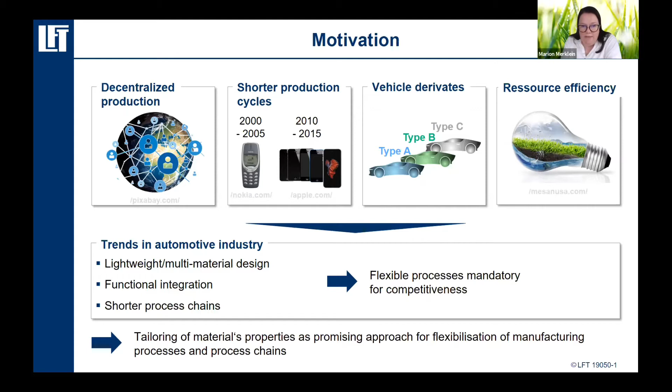Our idea is to tailor the material properties in order to fulfill all these demands. If you look at the definition of tailoring in the Cambridge Dictionary, it's called 'specially made for a particular purpose'. What does this mean for forming processes? In this context, it means we have to adapt the properties of materials to enable a specific forming operation, and to get a good, robust process chain with a successful product at the end.

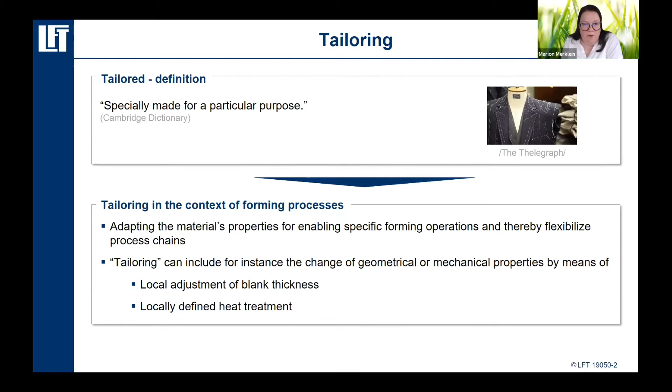This means that for tailoring, we need possibilities to adjust not only the geometrical aspects, but also the mechanical properties. This can be done either by a locally defined heat treatment of the material, to locally and temporarily adjust the mechanical properties, or we can also have a local adjustment of the blank thickness.

If we look at tailored blanks, the first ones we ever saw in the world were tailor welded blanks, for which different or dissimilar materials—dissimilar either in sheet thickness or in mechanical properties—were joined by welding.

A few years later, the first patchwork blanks arrived, where a second blank is used for local reinforcement, joined by either welding or gluing. Of course, all the designers told the engineers: wonderful ideas, but gluing, welding, the weld line—that's a defect within the material, so not so good. Could you please deliver some other ideas?

At nearly the same time, a group of researchers from Stuttgart and Erlangen developed the so-called tailor heat-treated blank—blanks for which a local heat treatment was used for a local, temporary adjustment of the mechanical properties.

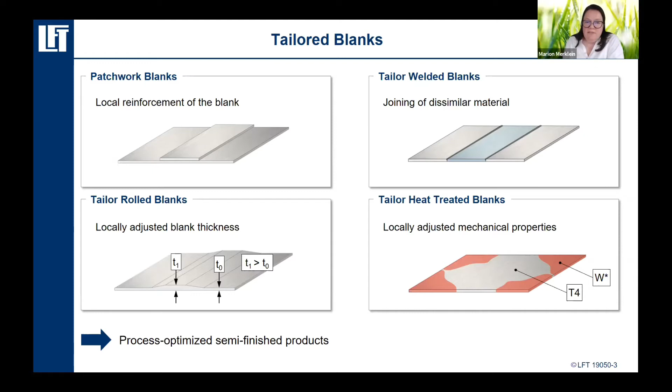In all cases, if you look at the literature, you can see that all these tailored blanks can be used as process-optimized semi-finished products for the improvement of forming processes.

So I want to talk about the tailored rolled blanks and the tailored heat-treated blanks. Why? The tailored rolled blank idea, as I told you, goes back to Rainer Kopp, and nowadays there is a company called Mubea.

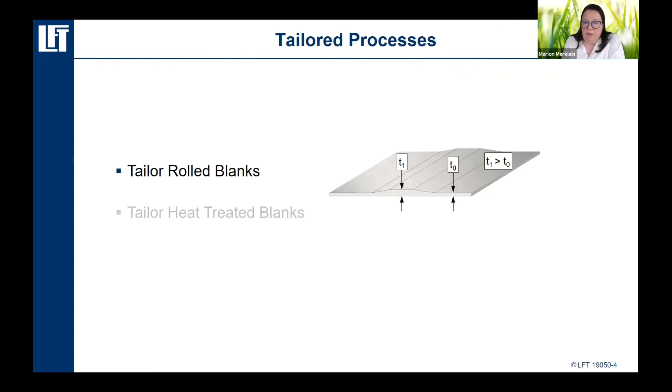They use such blanks also for the production, for example, of B-pillars or so in the automobile industry.

It was our idea about 12 years ago that we saw there was a huge number of components, not only in cars, but also in trucks, lorries, and machines - all such so-called functional components. Nobody is having a real closer look on them, but they are produced millions by millions, and so they are very important to take into account if we really want to improve material efficiency in the world.

So we took two typical examples. On one side, a synchronizer ring, you can see on the left, and a seat slide adjuster, that's the second component. One example is given by a company Diehl, another by a company Feintool, a company from Switzerland.

In all these components, you can see that over the last 30, 40 years, the demands on accuracy, functional integration, the aspect of weight of the components, and also the load-bearing capacity was increasing. And so the conventional production technologies came to a real limit. It was about 10 years ago that many companies said we reached an upper limit, we cannot enhance these limits. And so this was the time we started thinking there must be a new way.

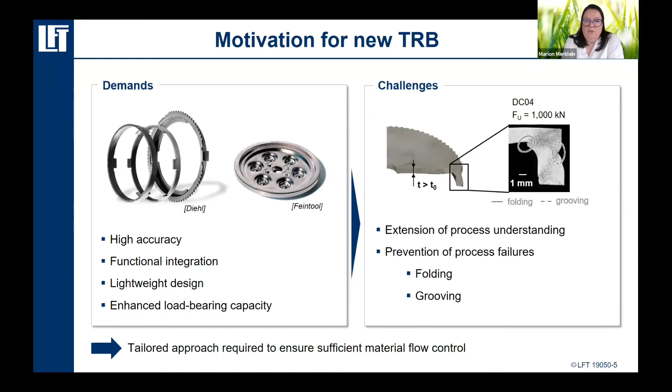Our idea was, why not use the idea Rainer Kopp had many years before, and enhance it to come to a tailored approach ensuring sufficient and improved material flow control in such forming processes. So what we did was, beside such tailored rolled blanks with a linear connection between two areas, we realized also circular tailored rolled blanks.

You can see here on the left the first example of such a tailored blank, where we increased the sheet thickness locally also in a rolling process. In this case, it's a mixture between a conventional rolling process and a ring rolling process. Doing so, we were able to increase the sheet thickness of the material where we need it.

And the comparison on the right, you can see if we use the conventional sheet, we have the problem of grooving and folding. If we use such a tailor rolled blank, we can see that the increase of sheet thickness will lead to an increase of stiffness, and so we are able to avoid the failures we saw before.

We can improve the quality, because in such a case, similar to a synchronizer ring, we need some geared teeth at the outside. So especially the geometry and accuracy of these gear teeth is very, very important in order to guarantee the function of the component afterwards.

What we saw is that we can improve the height of such gear elements by about 20 to 30%. That can be correlated directly with the increase of sheet thickness we can realize with a tailor rolled blank, and we can avoid the material backflow that is responsible for the folding of the material.

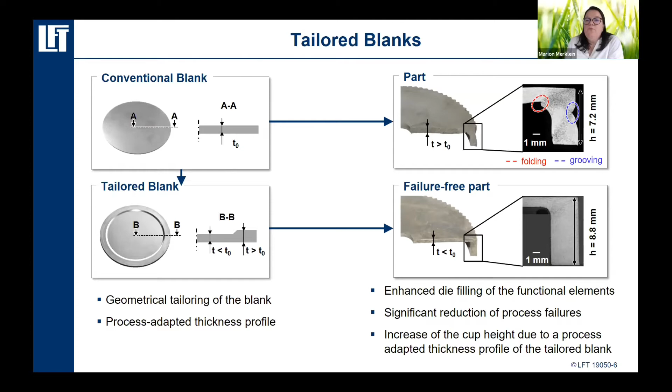But of course, doing so, we were at the beginning of the real fundamental research work. So what we did was investigate if we can apply such a technology on different materials, steels and aluminum alloys, to give a more general indication about the maximum thickening we can realize, and how we will influence the mechanical properties of such materials.

Here you see one example for two steels, a mild steel DC04 and a high-strength steel DP600. I can tell you that also for aluminum alloys we have similar results. So in general we can say in such a rolling operation we can have a local increase of the sheet thickness up to about 30%.

And 30% I think is a real good and interesting number, and according to the increase of the sheet thickness, of course, we have a strain hardening effect in the material, meaning that we change the mechanical properties, for example the yield strength and the tensile strength. These typical material values are increased by about 20 to 30%, depending on the work hardening exponent that is characteristic for the material.

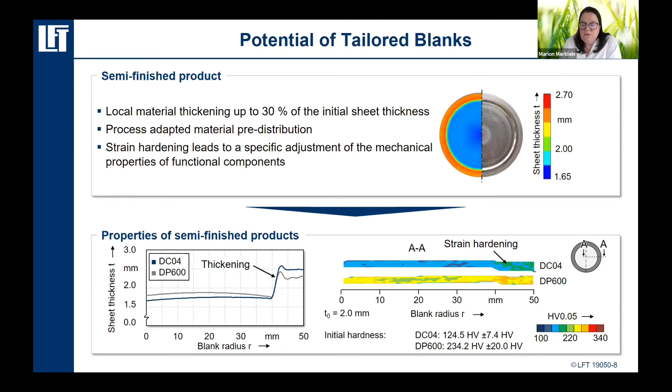As an indicator for this, you can see here some hardness measurements, because you can directly correlate the hardness and the yield strength of the material.

After our first success, we were interested in seeing which geometries we can realize. So we started, as you can see on the left, with a rotationally symmetric geometry - that was the real beginning. We had a thickening at the outside. Then we said, okay, let's also have a rotationally symmetric geometry on the inside with a reduced diameter.

And of course, then we had the idea - there must also be the possibility to realize cyclic symmetric and asymmetric geometry. As you can see, this is also possible, always in the same machine, using only different tools, which opens different possibilities to realize different geometries.

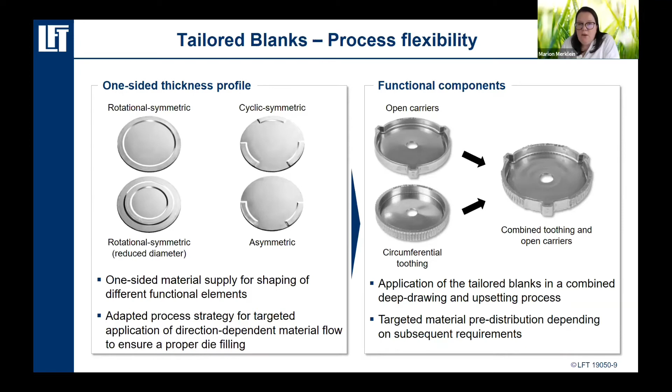For example, the geometries, as I mentioned before, such as what we call circumferential toothing - we can also produce open carriers and improve the formability. Or if we look at the next slide, we can see it's also possible to have such a thickening operation, a flexibilization of the material on both sides of the sheet metal.

And if we do so, we can also add, for example, such inner elements for carriers - internal carriers which are necessary for the load capacity of the component. So we can combine nearly any idea of thickening in order to improve the forming behavior and also the function of the component afterwards.

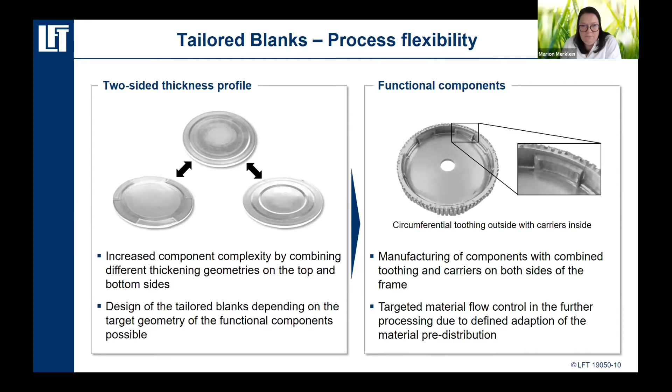And of course, that is one way that is especially important for steels. I can really say that's the most effective way to improve and flexibilize the formability of steels. In contrast, the second very important material for design in forming operations is aluminum. We need also a solution for that.

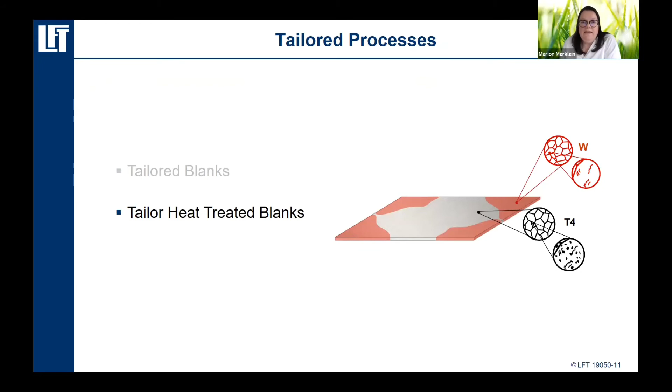The idea behind that is the so-called Tailor heat-treated blanks. What does this mean? The principal idea goes back to a publication from the 50s. They made such a local heat treatment and annealing for the first time with some copper. Afterwards, in the 90s, it was my colleague Frank Vollertsen with Kurt Lange - they investigated it on aluminum alloys.

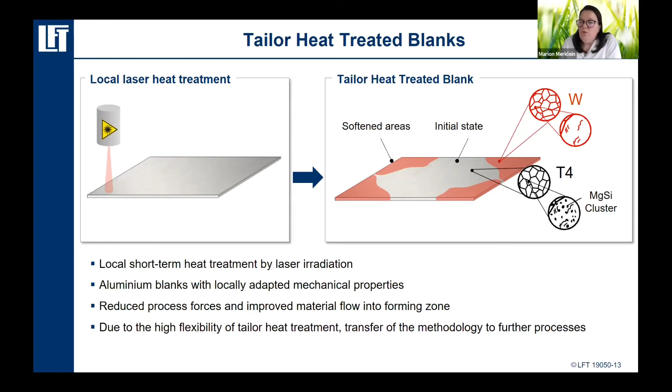The idea is to use a laser, for example, or any other heating device to have a very short local heat treatment, about 3-4 seconds, and to use the quenching effect and the solutioning effect of aluminum alloys so that we can soften the material locally. As a consequence, we can improve the material flow, lower the process forces, and flexibilize again the tools we use for different materials.

To show this to you, I can give you an example of a drawing tool that is used for drawing outer door panels. This is designed for the drawing of a steel forming operation. And if you use an aluminum alloy, in this case a precipitation hardenable aluminum alloy, you can see at once that fracture may occur.

As a consequence, we said, okay, we can do such a process analysis using finite element analysis, investigating where in reality the material flow has to come from, where the material flow stops first, and if we do so, we know which areas we have to locally heat treat in order to soften the material and improve the material flow.

On one hand, you can follow such a process route in the virtual world, doing all of that by FE analysis. On the other hand, you can also do it in reality, because you can transfer the results coming from the FE analysis. If you use, for example, optimization methods like simulated annealing, you can transfer the results regarding the mechanical properties of the material to a necessary temperature distribution.

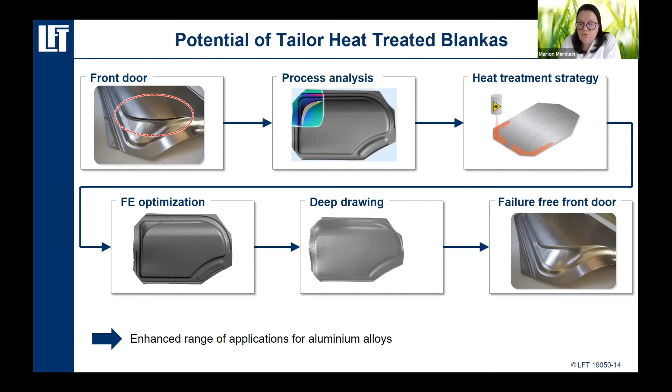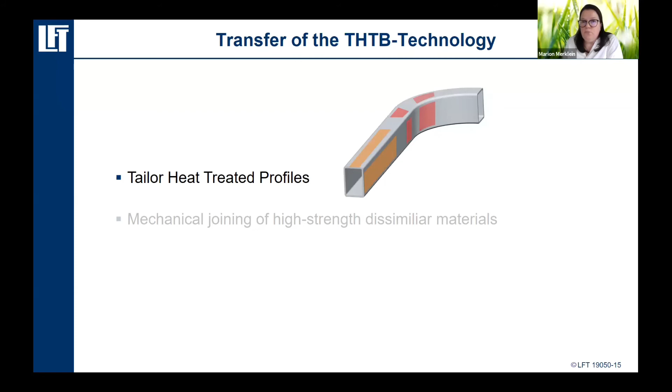There are some components within cars produced with this technology. We used it to go on and identify where the other problems are, especially using aluminum alloys. One idea was the tailor heat-treated profiles, because profiles are more and more important in the field of the body in white. But the problem with profiles is that wrinkling, deformation and necking may occur.

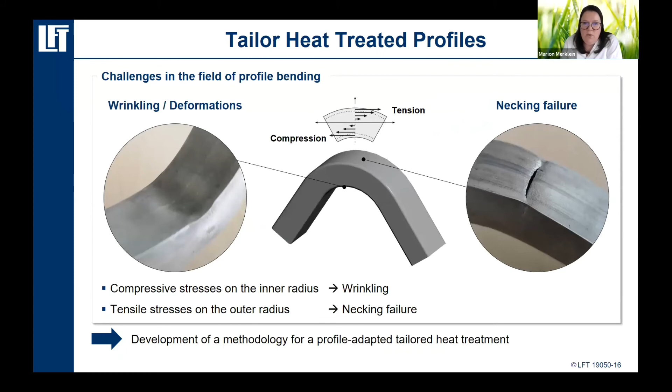This can be seen as a result of the compressive stresses and tensile stresses that occur. If we have such a wonderful method for deep drawing operations, then we are sure we can apply it also on such profiles. And what you can see here is, yes, it works.

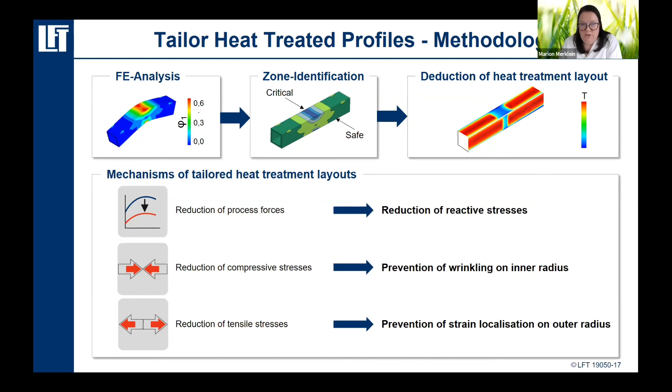The three main and important aspects are the reduction of forming and process forces by softening of the material, the reduction of compressive stresses meaning prevention of wrinkling, and the reduction of tensile stresses meaning prevention of strain localization. And that works also with the profiles.

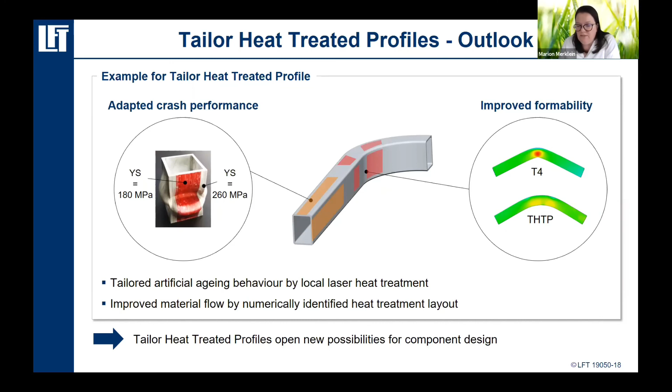Because of that, we also had the idea that we can use it to adapt the crash performance of materials. That is, I think, also a wonderful idea: if you can not only soften material but also harden it, you have, in case of a crash, the possibility to have the best mechanical properties in different areas of the material, so you can have the best safety for the passengers in such a body in white. At the end, we also had the idea, what about multi-material design?

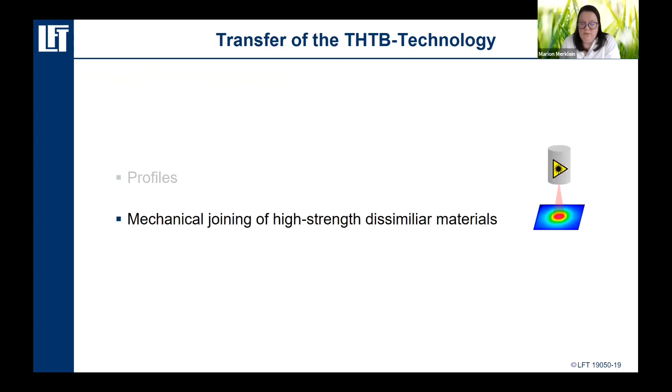Many of the companies working in this field complain about the limits of joining different materials, especially steels and aluminum alloys, and especially if we work with high-strength steels, for example an HCT 780, or also a hot stamp material with a high strength of about 1500 Newton per square millimeter.

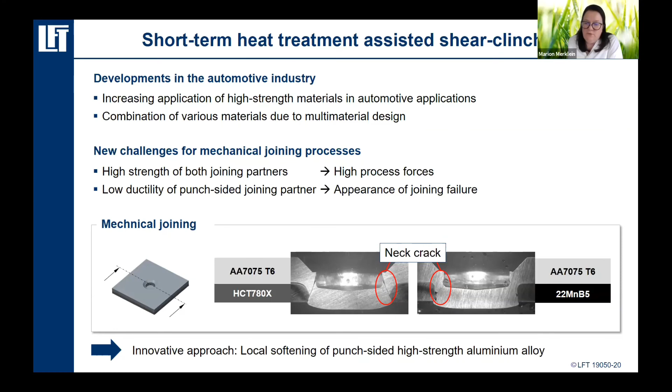In all these cases, the ductility and also the strength of the aluminum alloy are not sufficient to work with such a joining technology. The most important point is that with increasing strength of the aluminum alloy, for example a 7000 series, we have limited ductility.

We said, okay, if we have good results from two other applications, why not transfer the results to that as well? So what we did was again an analysis of how to locally soften the material to improve material flow, and the effect was exactly as we expected. Again, we can temporarily soften the material, improve material flow, increase the ductility a little bit, so we can come to a successful joining.

So we showed for the first time the possibility of joining parts out of dissimilar high-strength materials, especially using steels and high-strength aluminum alloys.

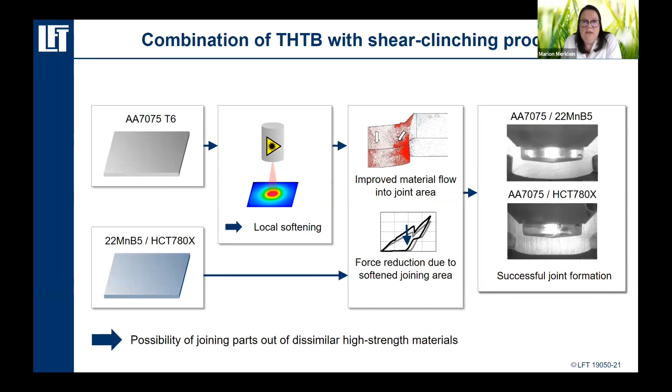It was my idea to show you that flexibilization of process chains is important, not only for competitiveness in the automobile industry—I think it's important in all areas of industry. One possible way to fulfill these demands is the tailoring of material properties. We can adjust the mechanical properties of many materials in a wide range, so we can work with different materials in tools that have been made for other forming operations. It seems to be a real effective method for the enlargement of process limitations.

Our interest for the near future is to go on not only with tailoring for one process, but for the whole process chain, because we expect an interaction with forming, joining, cutting operations, and also assembly. So at the moment we work on a way to implement and use data from different processes to achieve process control for process chains. The idea is to come, in the near future, to a zero waste production. So I hope I was on time, and of course I'm open for questions.